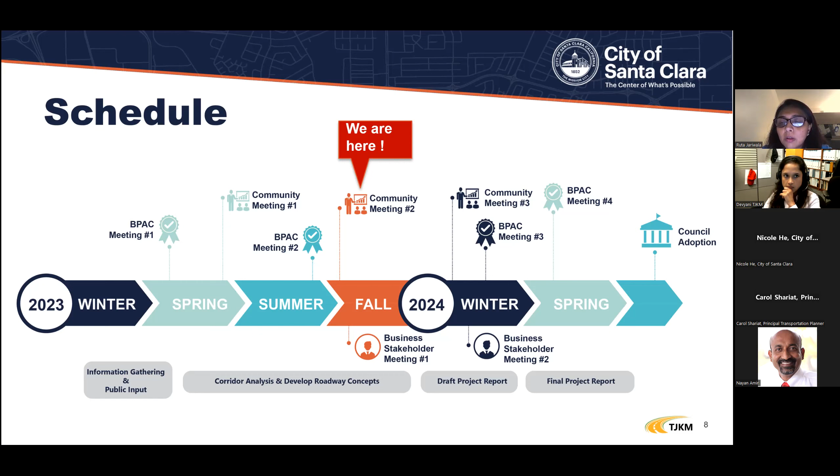So we do want to hear back from you, your concerns, your selections for specific concepts, and if you have any questions regarding them or you want us to modify something, then please do let us know. And once that is done, we'll take the plan to council for adoption.

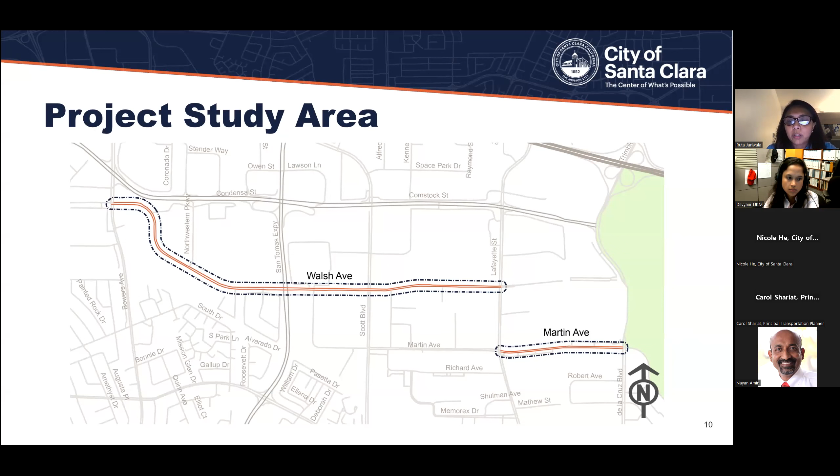Quickly want to go through the study area. Our study area for this particular project has two corridors, Walsh Avenue and Martin Avenue: Walsh Avenue between Bowers Avenue and Lafayette Street, and Martin Avenue between Lafayette and De La Cruz. Existing conditions, what does Walsh Avenue look like? Walsh Avenue is a 1.7 mile east-west minor arterial corridor with 4 lanes, so 2 travel lanes in either direction. The adjacent land use is predominantly office buildings and industrial parkways.

Currently, it does have a Class 2 bike lane from Bowers Avenue to San Tomas Expressway. It also has the VTA ACE shuttle running along Walsh Avenue. There is on-street parking available on Walsh Avenue, but just between Martin Avenue and Lafayette Street.

Martin Avenue, again, the corridor that we are studying is from Lafayette Street to De La Cruz. It's a 0.5 mile east-west collector corridor in central Santa Clara. It's a 4-lane roadway, 2 lanes in either direction. Land use is predominantly industrial. On-street parking is available on both sides of the corridor.

So we do want to go through the outreach effort that we have done so far. We do have a project website specifically for this particular project, so please do visit our website. It's a good way to keep in touch with the project and also get updates. Through our project website, we do have a map input platform that allows you to let us know what your issues and concerns are. By getting to that platform, you can actually pinpoint on a map, or also let us know throughout the corridor if you have any issues between the blocks.

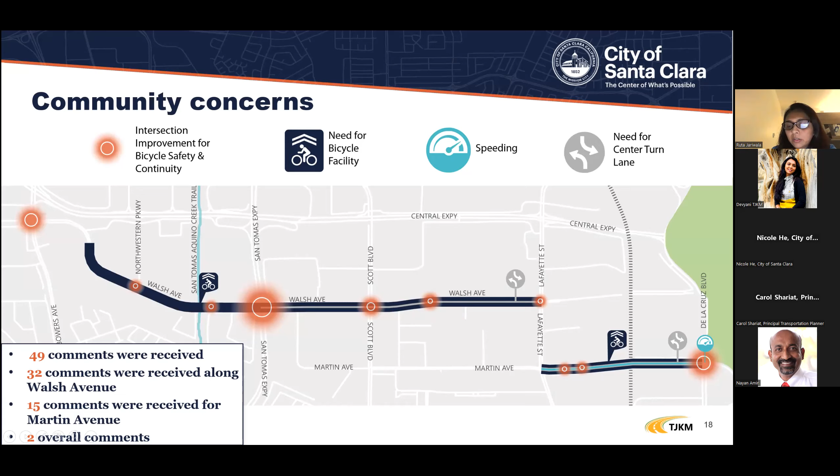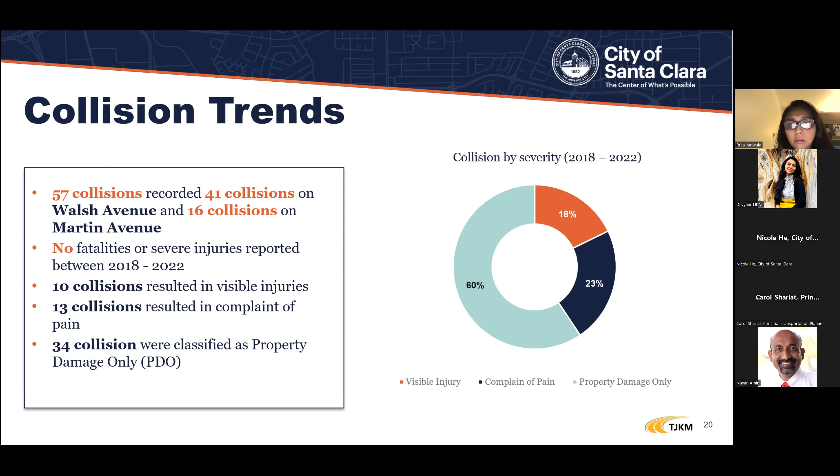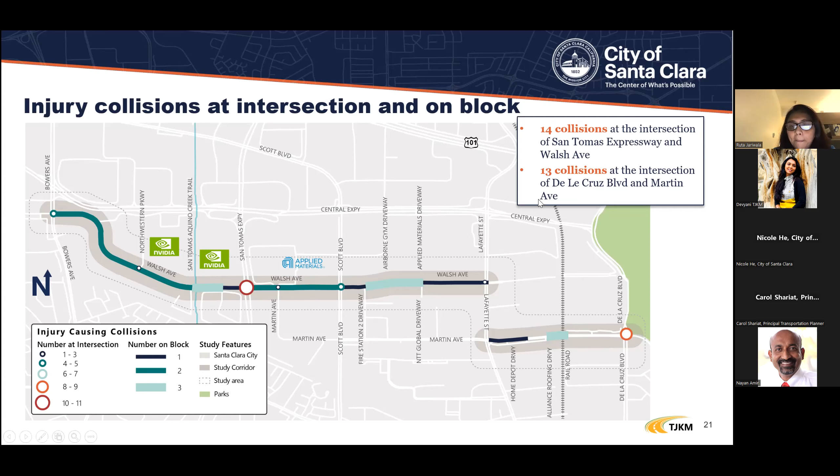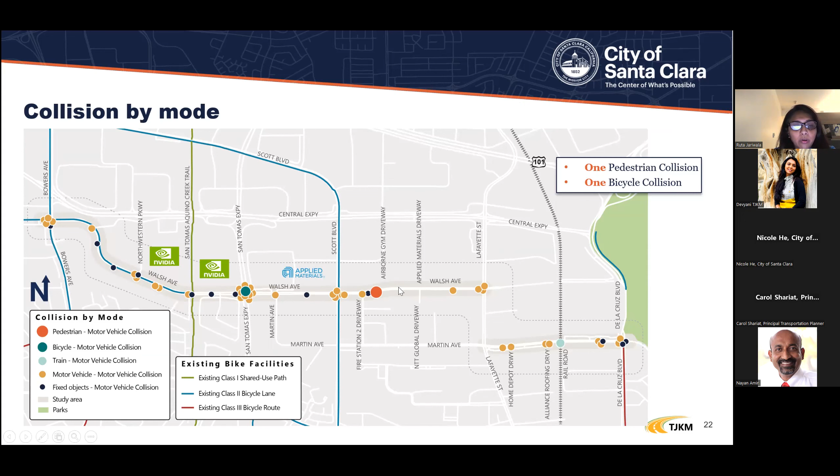A lot of these collisions were at the intersection. 14 collisions were reported at the intersection of San Tomas Expressway and Walsh Avenue, and 13 collisions were reported at the intersection of De La Cruz and Martin, right there. Collision by mode: we analyzed the collisions to see whether they were motor vehicle collisions with pedestrians or bicycles, or with other motor vehicles. There was one pedestrian collision and one bicycle collision through the corridor, as you can see.

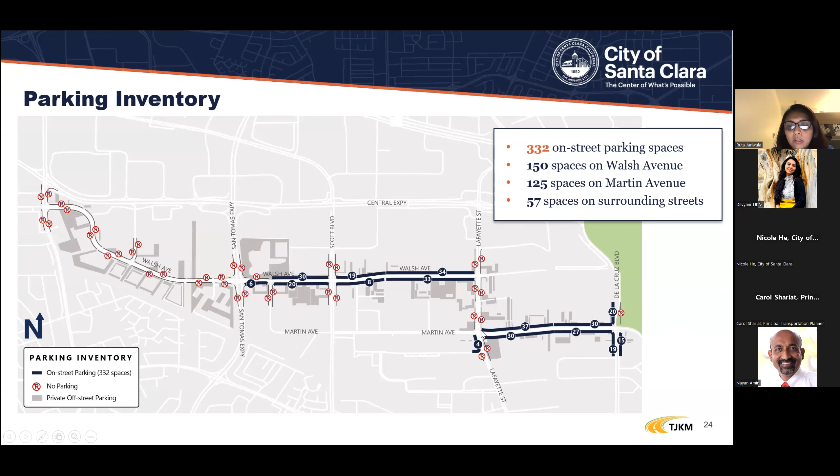Parking analysis: we also did parking analysis through the study corridor. In total, there are 332 on-street parking spaces, 150 spaces on Walsh Avenue, 125 spaces on Martin Avenue, right there, and then 57 spaces on the surrounding or neighboring streets.

There are parking restrictions wherever parking is allowed. We have a 1 hour parking restriction right here between San Tomas and Scott, a 4 hour parking restriction between Lafayette and De La Cruz, and a 6 hour parking restriction on the north side of Martin Avenue, between Lafayette and De La Cruz. Overall, the parking restriction is no stopping anytime, and vehicles over 20 feet in length are not allowed to park through the corridor. A major chunk of the corridor, as you can see, has no parking, so parking is not allowed there in the existing condition.

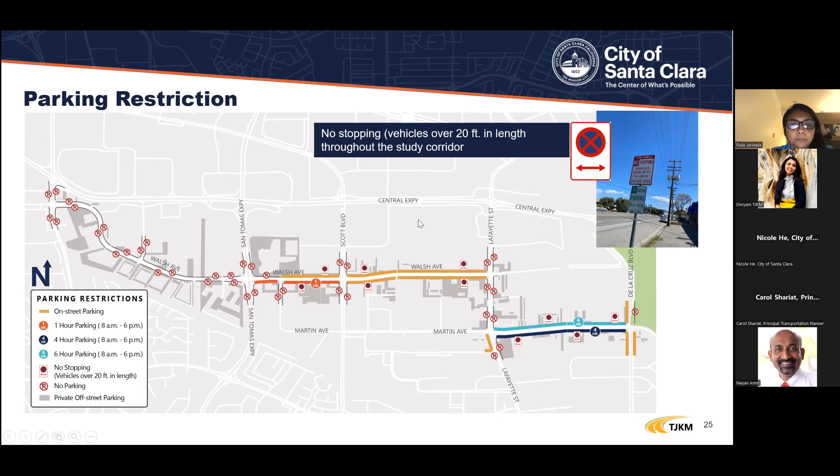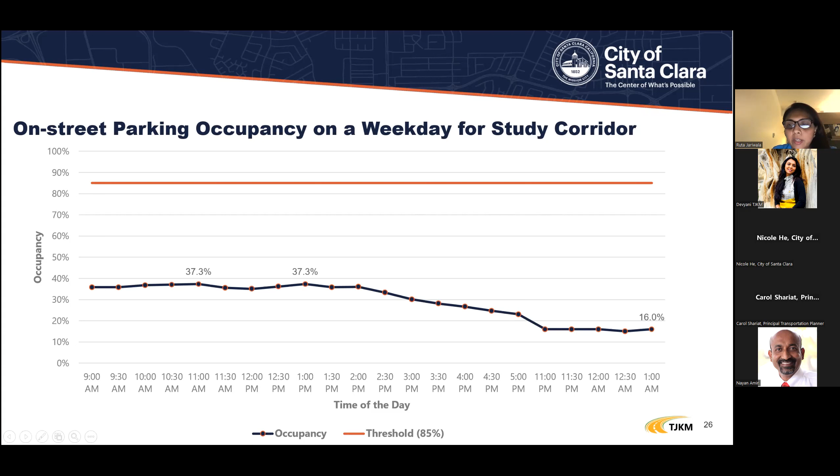We also did on-street parking occupancy for weekday. This is an average. As you can see, 37% of the parking is occupied on a weekday. We conducted the same analysis for the weekend, and approximately 29% is occupied over the weekend at 11 a.m. in the morning, and 17% at 12:30 a.m. at night.

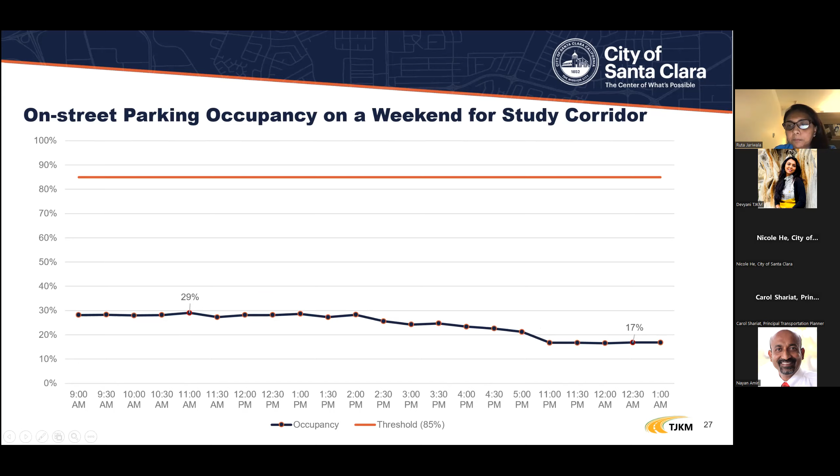Parking demand. This slide illustrates the weekday parking at 11 a.m., which is the peak. A total of 37% of the corridor is occupied. 124 spaces are occupied during that time, and 208 spaces are unoccupied. So overall, the parking occupancy on a typical weekday is significantly lower, meaning it is lower than the 85% threshold that we generally look at.

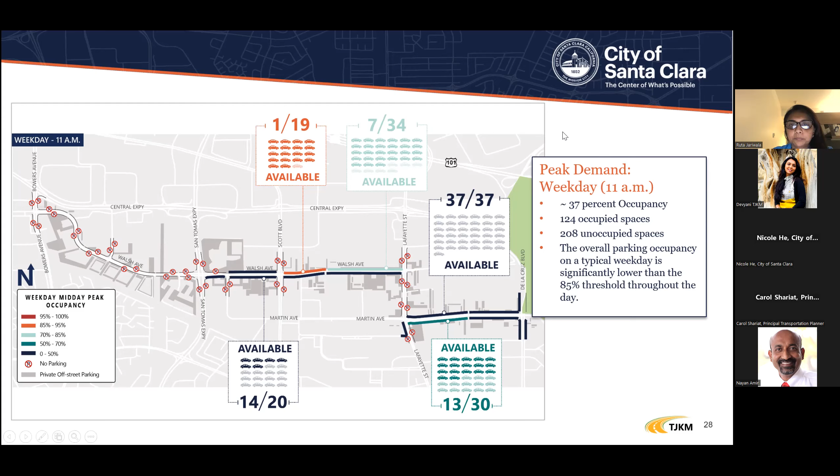Estimated parking utilization. We also looked at where people park on the corridor, north side or south side. Our inventory shows a total of 83 spaces available on the north side of Walsh Avenue, right here, out of which 39 were occupied, so we have a utilization rate of 47%. A similar calculation was done for the south side: there are a total of 67 spaces, 17 cars were parked, so a 25% utilization rate. The north side of Martin was 16%, the south side of Martin was 33%, and the side streets utilization rate was approximately 19%.

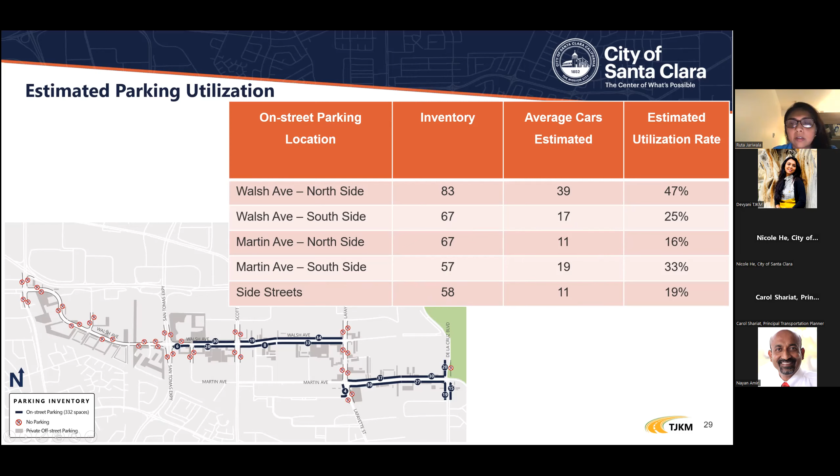Now diving into the design concepts and alternatives that we want to get your input on. We have divided the corridor into 5 sections: Section A, Section B, Section C, which is the section over the bridge, Section D, and Section E.

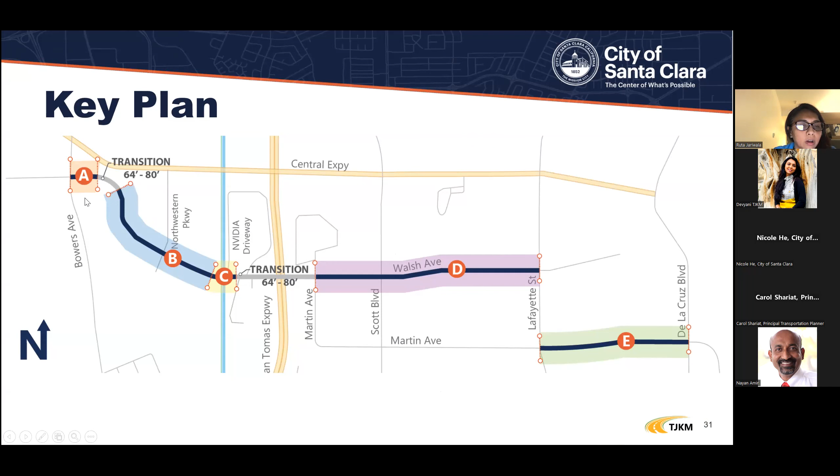Quickly going through the existing cross-section for Section A, which is right here. We have 2 travel lanes on either side with a turn lane and a small median. And in existing, we do have a class 2 bike lane. When I say class 2 bike lane, that means there is no buffer separating it. It has its own lane, but it's not separated by a buffer. So we do have an existing class 2 bike lane.

What we are proposing for that section is we still maintain the 2 travel lanes in either direction with a turn lane, which is for left turns, and maintain our median of 3 feet, but also reduce the widths of the lanes. As you can see, it was 14 and 13, which was pretty wide. So we are going down to 11 feet each, and introducing a buffer between the bike lane and the travel lane, so that it makes it safer for bikes to ride in the bike lane, and creating a class 4 facility instead of a class 2 facility.

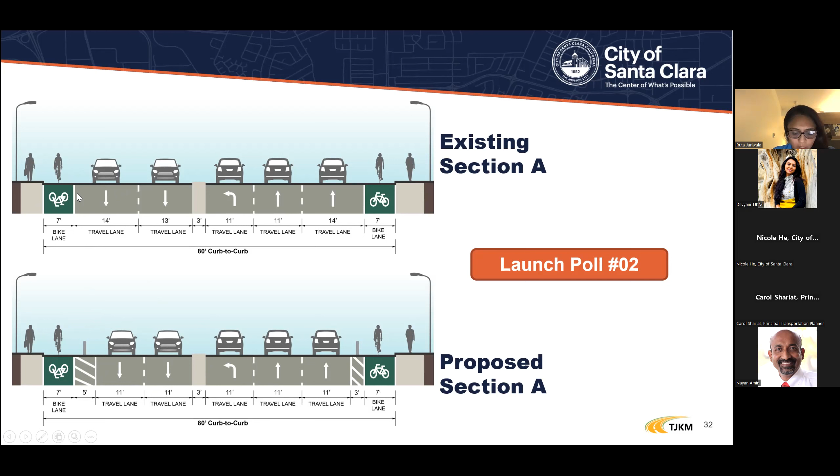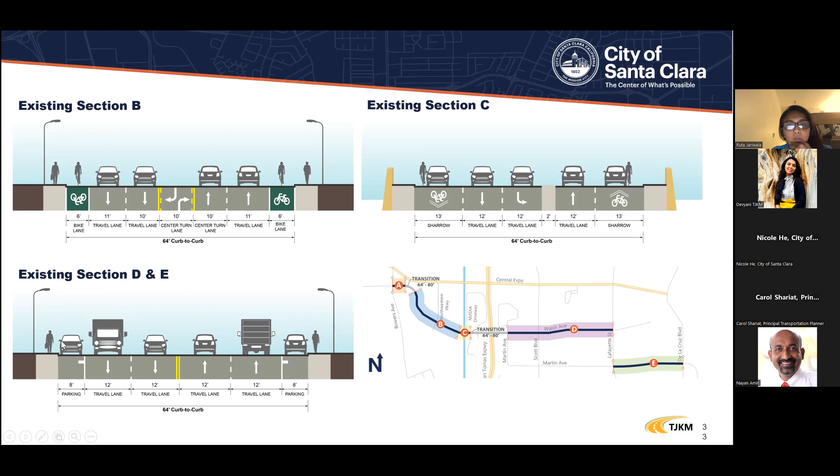Quickly want to go through the existing cross sections for other sections too. Overall, like I mentioned before, both corridors have 2 travel lanes in either direction, so a total of 4 travel lanes. Section B right here has an existing class 2 bike lane. Section C has shared the road, so it's not really striped, but we do have legends that say bicyclists and vehicular traffic need to share that lane. And then sections D and E again have 2 travel lanes in either direction with parking on both sides. So that's how our existing section looks, and throughout the corridor, we do have 2 travel lanes.

Getting into the concepts here. One of the concepts we're looking at is maintaining the 2 travel lanes in each direction, so having 4 travel lanes, no parking, but converting the class 2 bike lane into a class 4 buffer-separated bike lane, which is a protected bike lane. Again, by reducing the widths of the travel lanes, we could easily accommodate a class 4 bike lane. This concept can be applicable to all the sections, which are sections B, C, D, and E.

The next concept that we looked into was taking away 1 travel lane. So now we have 1 travel lane in either direction with a center turn lane. And then we are also introducing the class 4 bike lane, which is again buffer separated. This concept is applicable to section B and section C.

The next concept that we are looking at is maintaining 4 travel lanes, no parking on one side, but still maintaining parking on one side of the corridor. At this point, we have not decided which side of the corridor would maintain the parking. That would be decided in the design phase, but it does have 2 travel lanes in either direction, a class 4 bike lane on both sides, with parking on one side. This concept will be applicable to sections B, D, and E.

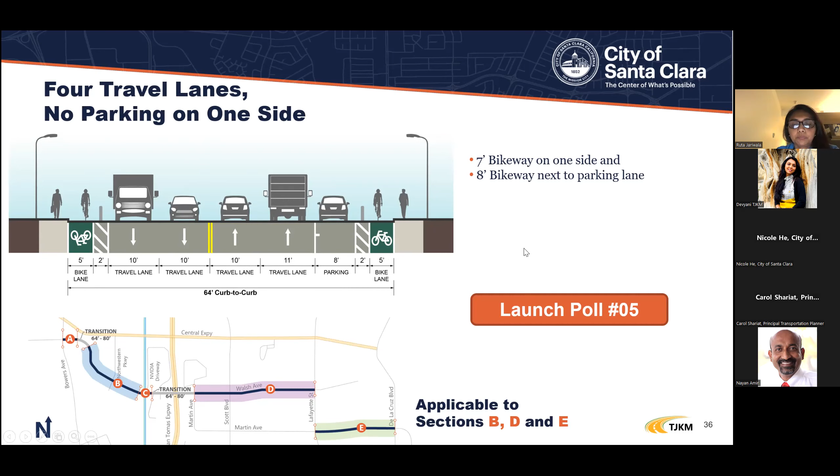And then the last concept we looked at was 2 travel lanes, so 1 travel lane in either direction. We have an 8-foot bikeway, which has a 5-foot bike lane and 3-foot buffer, but we are maintaining parking on both sides of the corridor. So that's the last concept, and it will be applicable to B, D, and E.

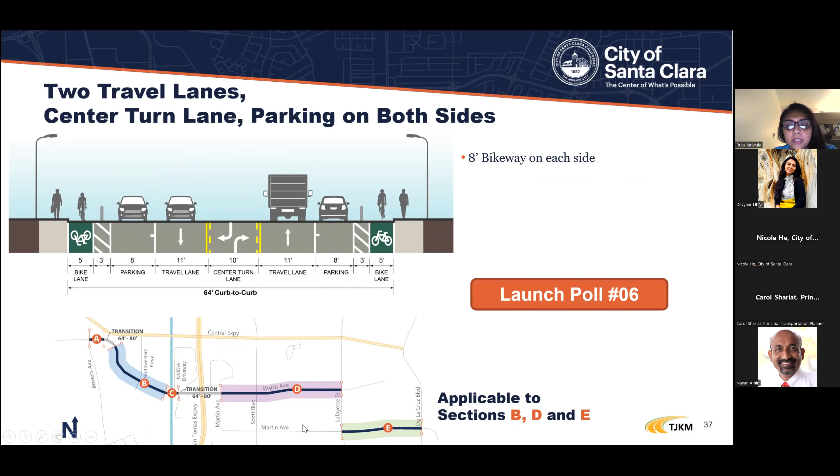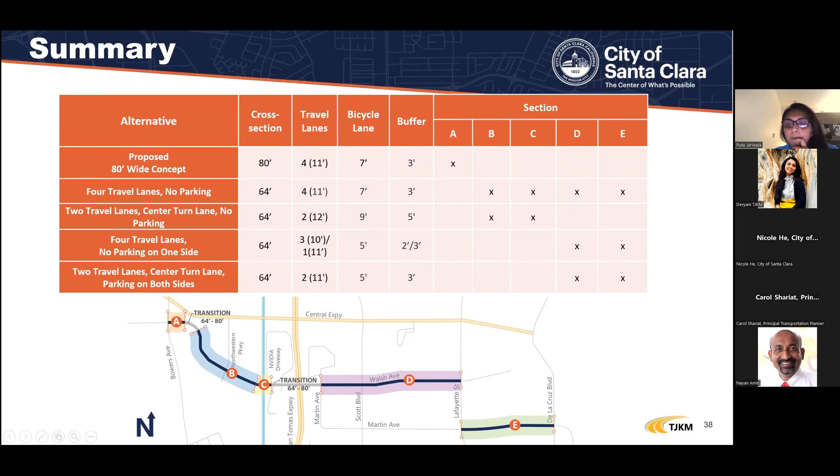So just to summarize all the concepts, as an easy look at this, we have 4 concepts that we are proposing. Their cross-section widths are given here: the travel lanes, bicycle lane widths, buffers, and which section each applies to. And with that, we would like to open it up to Q&A.

I think we can skip to the next slide. Should I stop recording? I just stopped actually.

So I want to quickly go through the next steps. We will be doing in-depth corridor traffic analysis, which we will share with you in our next meeting. Our next meeting will be community outreach round 3, as I mentioned in the schedule.